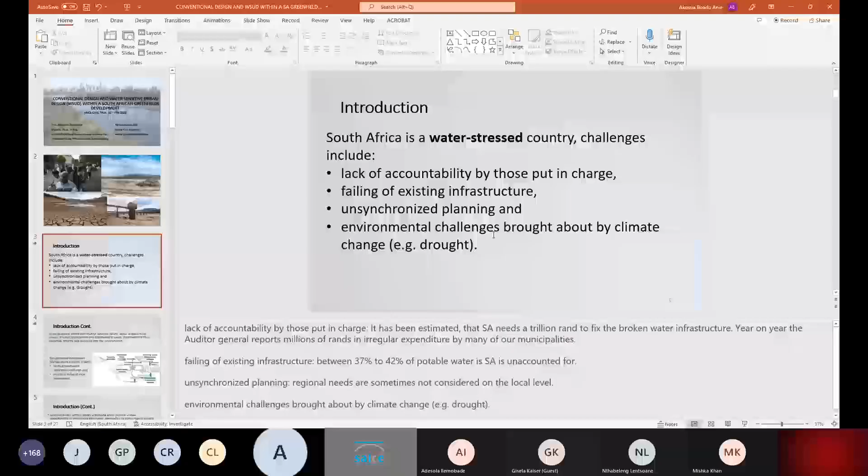Excellent, okay, so yes, all right, you may then start again. Thank you. All right, so I was taking you through...

...the challenges that we're currently facing: the lack of accountability of those put in charge, and the failing of existing infrastructure. Apparently 37 to 42% of potable water in South Africa is unaccounted for. Unsynchronized planning, where the regional needs are sometimes not considered on the municipal and local level when planning some of these infrastructure solutions. And the environmental challenges brought on by climate change.

Those environmental challenges include drought. In conventional water distribution systems, water is taken from source, treated, transported, and distributed back to users. Wastewater is then collected, treated, and disposed into the environment.

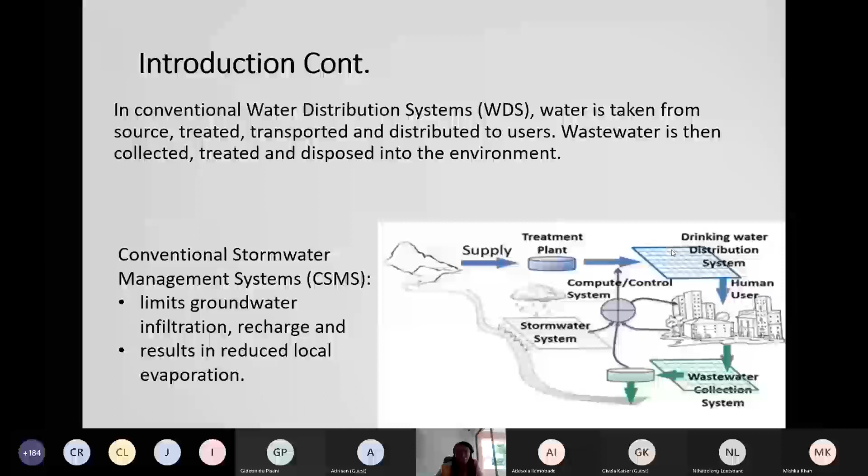Conventional stormwater management systems limit groundwater infiltration and evaporation. These conventional systems have served us for many years, but at this point, there are some challenges that need to be improved upon.

Greenfield developments within urbanizing areas present a unique opportunity to implement alternative approaches to conventional potable and stormwater management. An integrated systems-based approach that takes into account the available water resources, the different water users, sanitation, and stormwater issues can transform many of our urban areas from water wasteful to water sensitive.

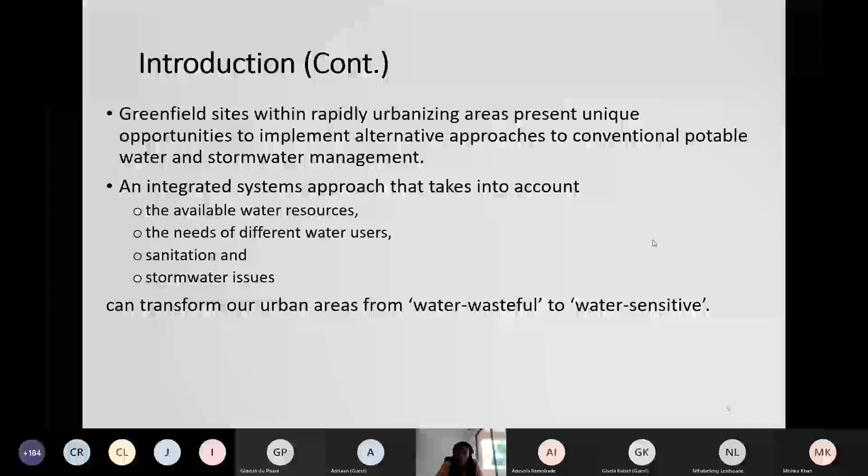This integrated systems-based approach is termed water-sensitive urban design, or WSUD, as it's publicly known. It's loosely described as ensuring urban design is done in a water-sensitive manner, with the final goal being the holistic management of the urban water cycle. WSUD is also known in many parts of the world as low impact development, sustainable urban drainage systems, sustainable drainage systems, best management practices, and green infrastructure.

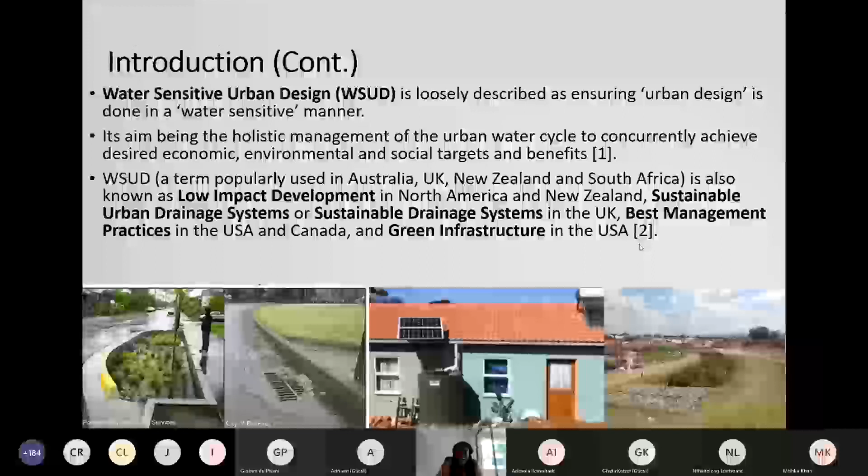I'm now going to take you through a few examples of WSUD systems. The first one being rainwater harvesting. Rainwater harvesting is the collection of runoff for temporary storage and use.

In 2010, a study was conducted in a town called Kleinmond in the Western Cape, where 410 low-cost houses were built to be less reliant on municipal water. One of the solutions implemented was rainwater harvesting, meaning they put a dual water system in those houses. The project was highly successful, and it's become a good example for many of our state entities to replicate.

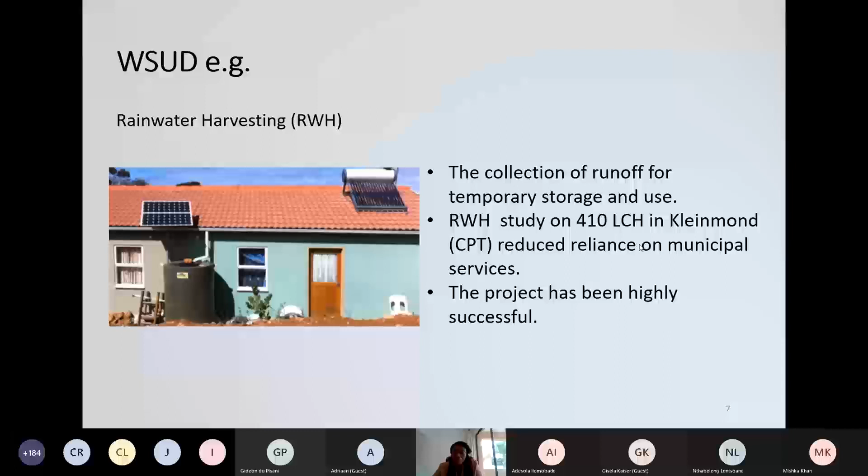Permeable pavements allow runoff to infiltrate through the surface into underlying sublayers. Swales are the next example. Vegetative swales are grass-lined channels that convey stormwater.

In 2017, a study was conducted in Diepsloot, a low-income settlement in Johannesburg. The project aimed at introducing WSUD in the settlement to enhance the existing surface water quality and reduce the quantity of stormwater, because they were facing a lot of localized flooding. The study was also highly successful and concluded that WSUD implementation in informal settlements is viable if the community conditions are relatively stable and the community members are sufficiently incentivized.

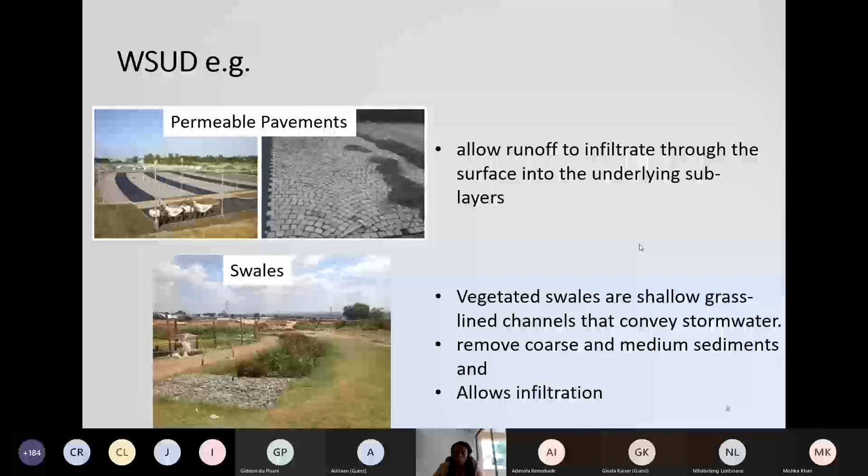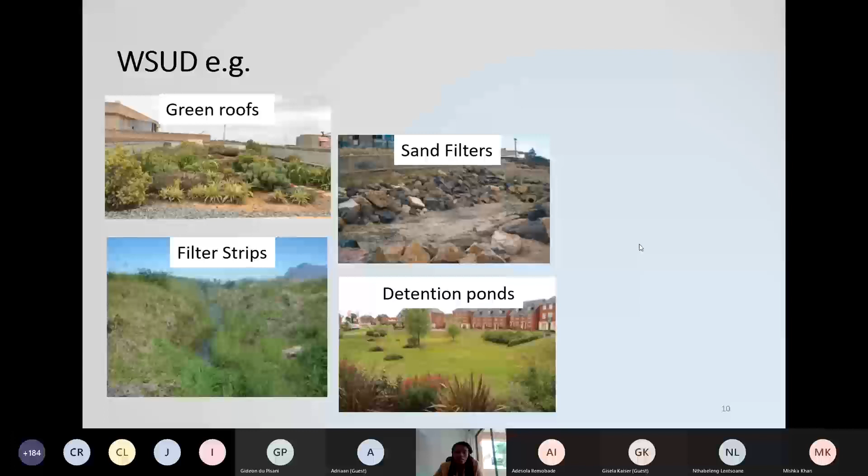Infiltration trenches are also a perfect example, as are bioretention areas, green roofs, filter strips, sand filters, detention ponds, retention ponds, and constructed wetlands.

The key benefits of WSUD include: it reduces and delays stormwater runoff volumes, it enhances groundwater recharge, it reduces stormwater pollutants, it reduces the demand for treated municipal water supply, it limits the frequency of sewage overflow events, it allows for affordable food production locally, it improves air quality, and has so many social benefits, such as improved amenity.

So the problem statement in this study was: are the benefits of applying the WSUD method in a greenfield urban development likely to outweigh the benefits of the conventional design methods?

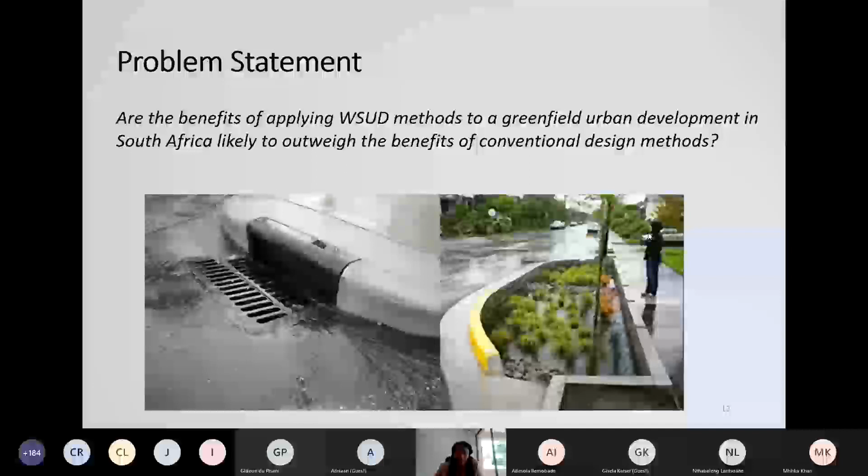The study compares the conventional design and the WSUD design of stormwater and potable water systems. This study was conducted in a greenfield township development in the south of Boksburg in the city of Ekurhuleni. The benefits of both designs were compared. The development is approximately 75 hectares large, and it was designed to accommodate 1,500 mixed-use urban units. The site is currently undeveloped and just has fallow grassland on it.

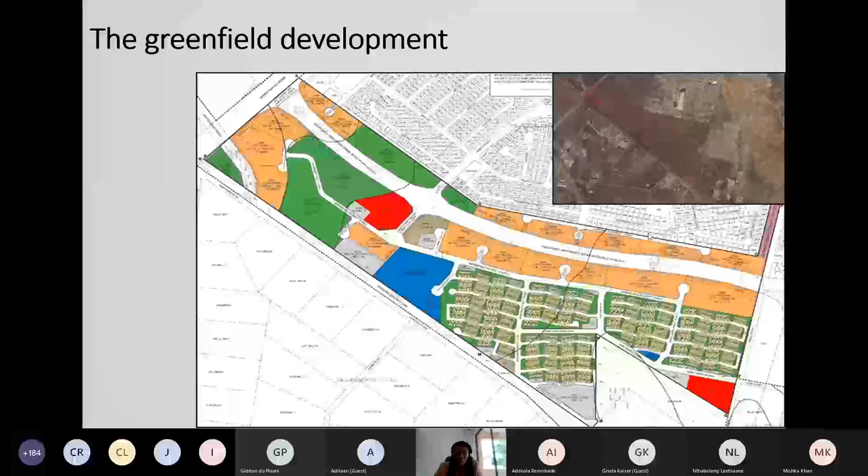So we developed a roadmap as to how we were going to answer this question. The first thing we needed to do was identify the applicable conventional and applicable WSUD solutions, following which we were to determine the pre and post-development runoffs. The third task was to calculate the cost of the conventional infrastructure and the cost of the WSUD infrastructure, following which we were to determine the potential savings and or losses from the implementation of both solutions.

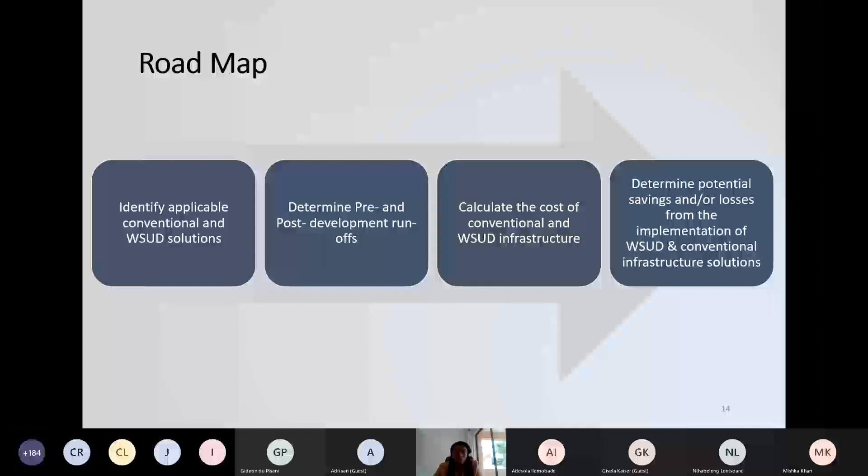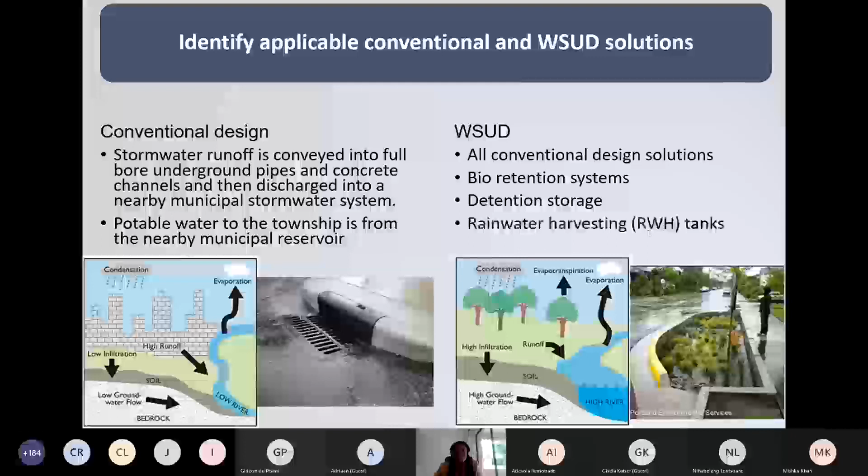The conventional design included the determination of the stormwater runoff generated within the development and also nearby the development on a sub-catchment level. It also included potable water to the township from the nearby municipal reservoir. The WSUD solution included all of the conventional design solution as well as bioretention systems, detention storage, and rainwater harvesting.

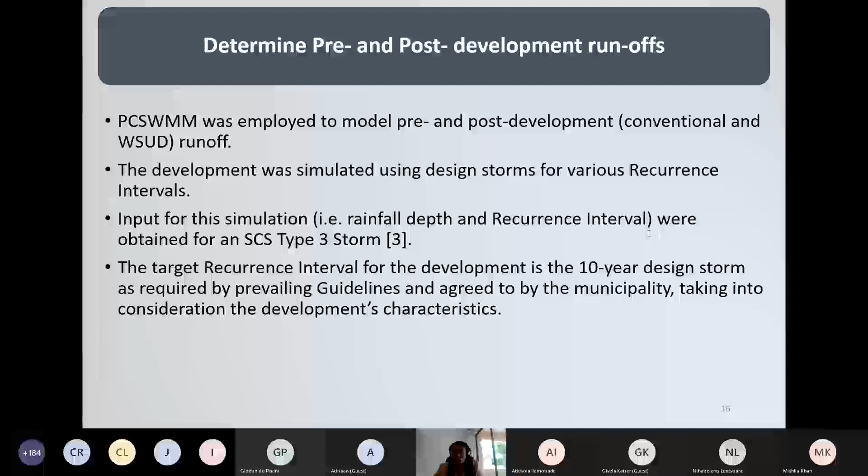As I said earlier, the first task was to determine the pre and post-development runoff. The second task was to model the pre-development runoff. PCSWMM was employed for this task, and a simulation of the model was run. The development was then simulated using design storms of various recurrence intervals. The targeted recurrence interval for the development on the local level was the 10-year design storm, as required by the guidelines and the local municipality.

The results of the potable demand showed that the development required 37 liters per second, of which the non-potable demand amounted to 13 liters per second. So prior to sizing the rainwater harvesting tanks, it was vital that the non-potable demand is accurately determined.

The use of the city's guidelines resulted in an annual average demand of 37.57 liters, and this corresponded to a peak flow of 76 liters per second. The non-potable water uses identified in this study included toilet flushing, irrigation, and laundry.

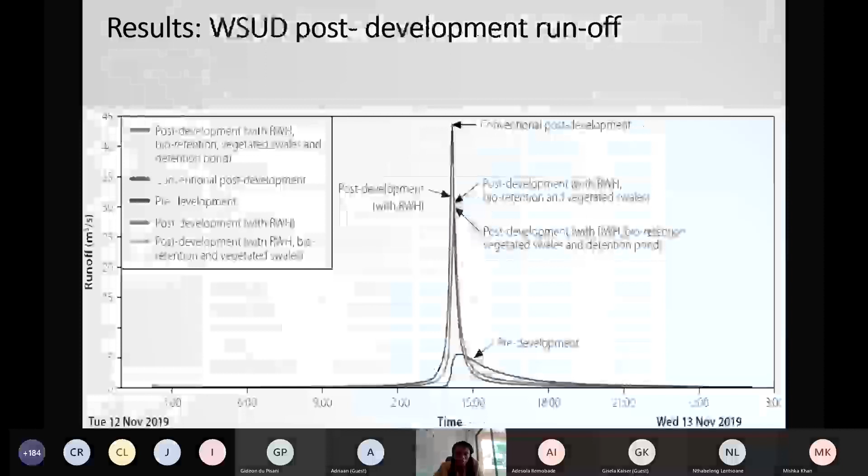To make the study easier to understand, 3 WSUD scenarios were modeled. This was to arrive at the best combination of WSUD interventions to meet the required output. Basically, we needed the post-development scenario to meet the pre-development conditions. Pre-development meaning before anything is put on the ground, the runoff generated — we need the post-development to match that runoff.

So we implemented 3 scenarios. The first scenario was the implementation of rainwater harvesting. In this scenario, the peak runoff reduced from 43.58 cubic meters per second to 31.88 cubic meters per second, a 26.85% reduction in runoff. So just by implementing rainwater harvesting, we were able to reduce the runoff by 26.85%.

In the second scenario, in addition to rainwater harvesting, bioretention cells and vegetated swales were added to the treatment train. Peak runoff reduced from 31.88 cubic meters per second to 30.7 cubic meters per second, a 3.7% reduction.

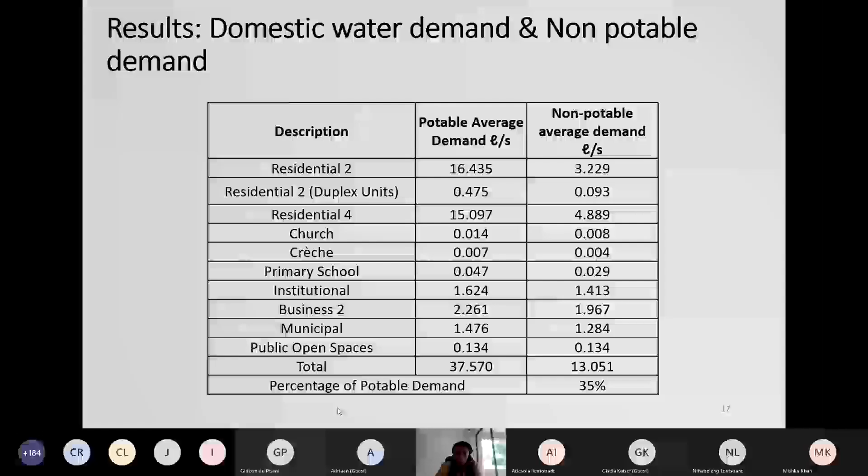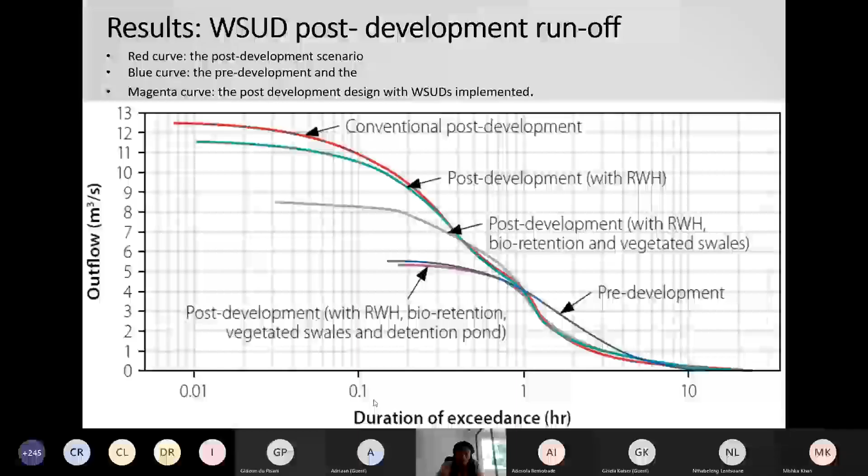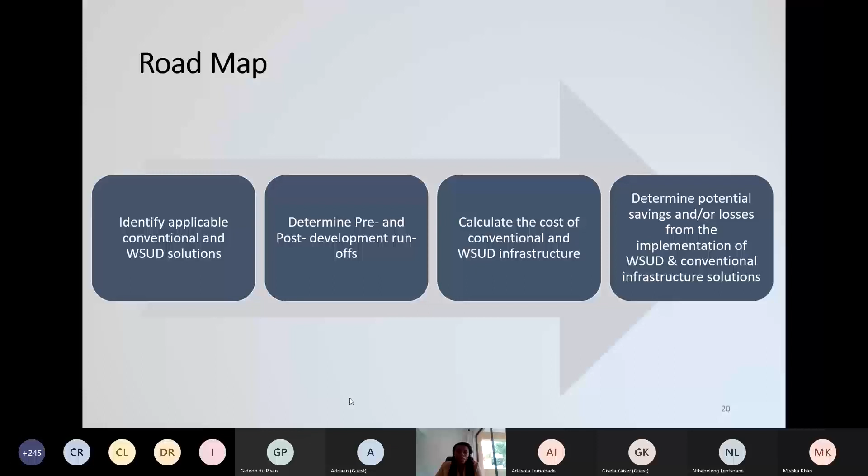So we're just going back to the roadmap to remind ourselves. We have identified the applicable conventional and WSUD solutions, and we've determined the pre and post-development runoffs. The next task was then to calculate the cost of the conventional and the cost of the WSUD infrastructure.

A bill of quantities was prepared and the capital cost calculated for each intervention. The conventional post-development infrastructure cost 81 million rand, with an annual operation and maintenance cost of 563,715 rand 18 cents. This annuity sum over the project life cycle of 40 years at a nominal interest rate of 6.5 — this was the JSE rate in 2019 — translated into a present value for O&M of 7.9 million.

The capital cost with the O&M costs came up to 89 million rand. I beg your pardon — in scenario one was the inclusion of rainwater harvesting in the treatment train. The capital cost for that solution was 81.8 million rand, with an annual operation and maintenance cost of 1.1 million. This operational cost over the 40-year life cycle came up to 16.8 million rand. The present value of the capital and operations and maintenance costs was 98.6 million rand.

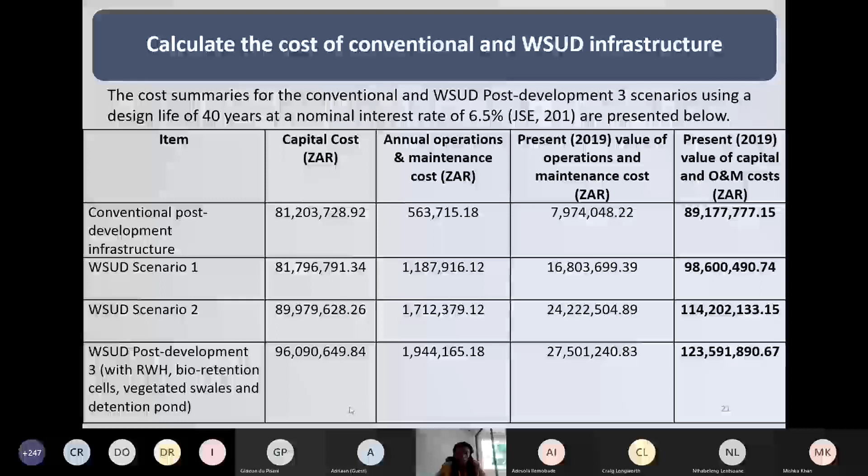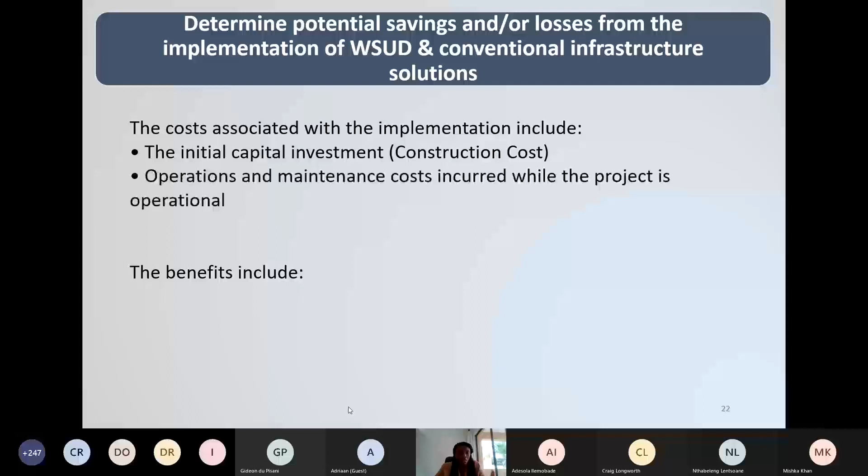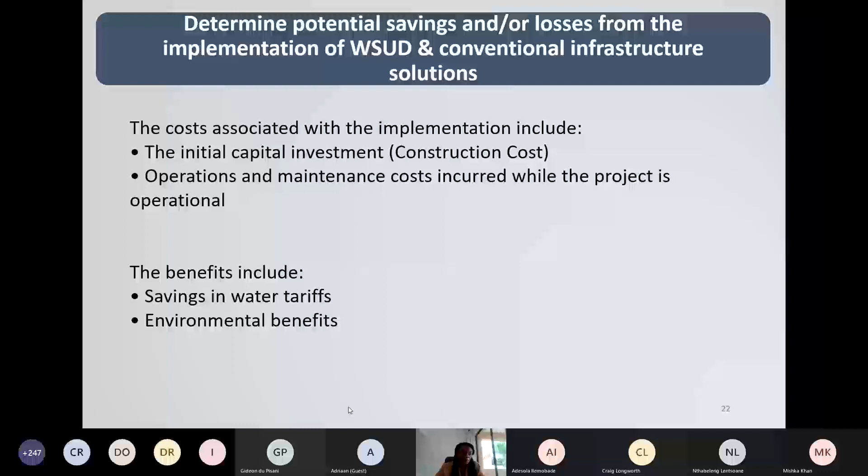The next task now was to determine the potential savings and/or losses from the implementation of the WSUDs as against the conventional system. The cost associated with the implementation includes the initial capital cost and the operations and maintenance costs incurred while the project is operational. The benefits we identified included savings in water tariffs due to the use of rainwater harvesting to augment the potable water demand, environmental benefits, and social benefits.

Savings in water tariffs calculated indicated that it was going to cost the city about 700... the savings in water consumption was around 777,000 rand per month. And this resulted in an annual value of 9.3 million rand.

Over the life cycle of the project, this came up to a saving in water consumption of 131.9 million rand. It was outside the scope of the project to measure the environmental and social benefits in monetary terms. As such, the benefits used in the cost benefit calculation will only be the savings in water tariffs.

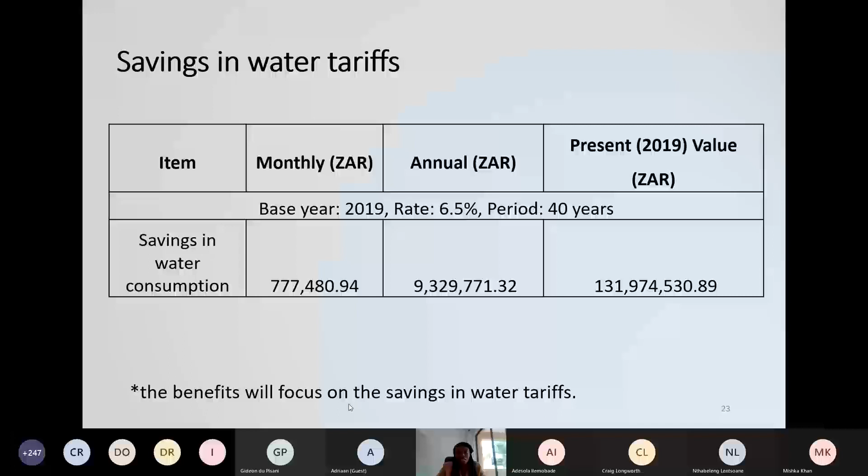The BCR is a ratio used to indicate the overall relationship between the project cost and its benefits. A benefit cost ratio greater than 1 indicates that the project is expected to deliver a net positive present value. This method is regularly used in analyzing and making decisions on development alternatives for projects. The cost benefit method was used in this project to evaluate the project cost and benefits.

Based on the calculations we've just been through, the capital cost, operations and maintenance costs, together with the savings in water tariffs, we then calculated the benefit cost ratio for the different scenarios. A benefit cost ratio of 1.07 was calculated for the entire project, that is in the scenario 3 example. The WSUD scenario 1 and WSUD scenario 2 resulted in higher BCRs of 1.34 and 1.16 respectively.

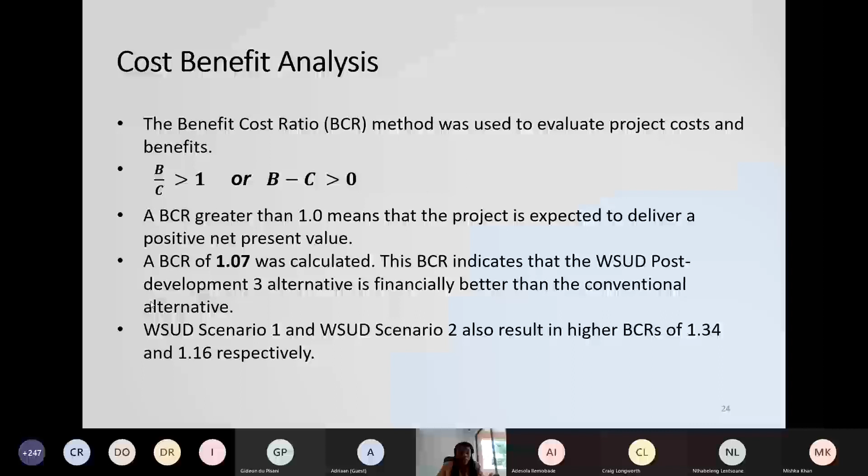The implementation of WSUD within the new development allows for the reduction in stormwater runoff generation and a decrease in potable water demand. Although the cost of implementing the WSUD was significantly higher than the conventional design, the BCR indicates that over a project life cycle, the WSUD scenario is economically more desirable than the conventional design.

Most importantly, this is a scenario where the social and environmental benefits were not accounted for. So this conclusion was arrived at even without considering those, meaning that if those were to be considered, the benefits could be way more. Considering that South Africa is a water-stressed country and many countries around the globe have now gravitated more towards this approach to urban design, it is highly recommended that we start thinking and moving in that direction.

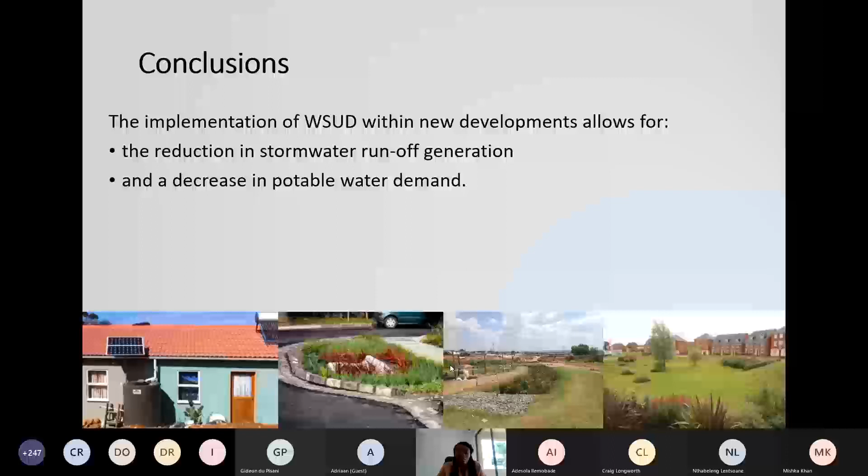This brings me to the end of my presentation. Thank you so much for your time.